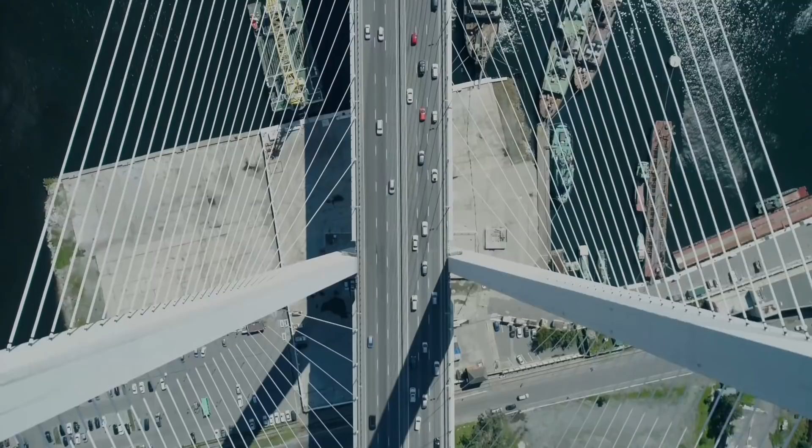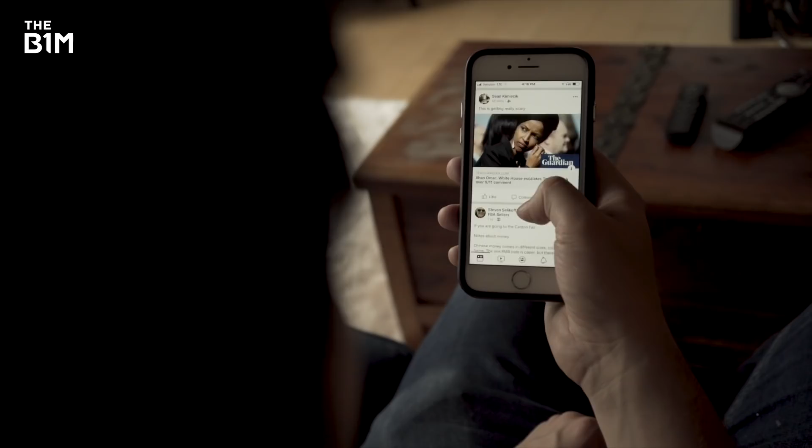The world we inhabit is now more connected than at any time in human history, transforming almost everything from the way that we communicate to how we trade, learn, and even develop relationships. The dawn of connectivity has had a fundamental impact on our culture.

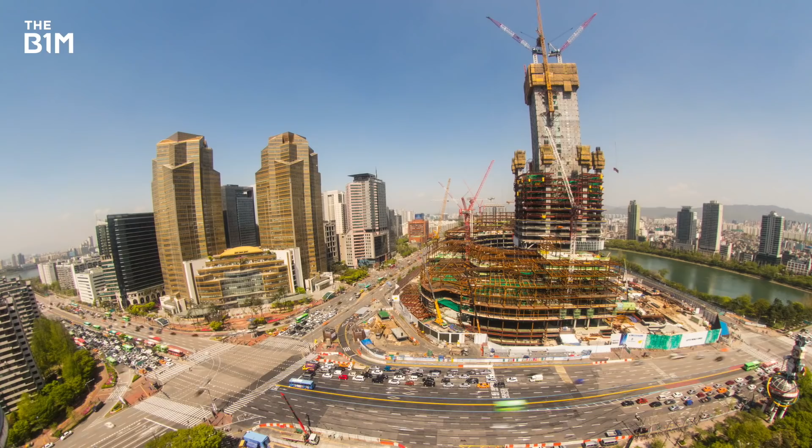No industry shapes each of our lives more than construction, and the sector is now being considerably disrupted by the very connectivity that its infrastructure projects helped to enable. Its people are united and working more collaboratively than ever before. Its status is now truly transparent. Its once dusty surface has been turned into a platform for the very latest technological advancements.

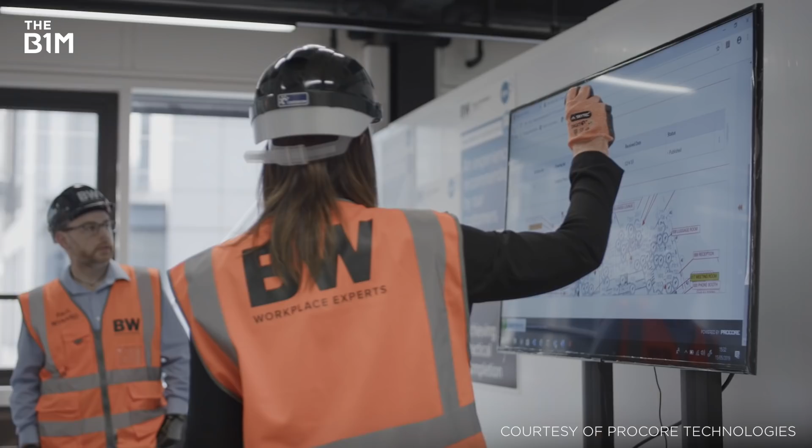So what do these new connected sites really mean for one of the world's most traditional industries? How do they work in practice? Which technologies are being deployed? And how will they improve the buildings and infrastructure that shape all of our lives? This is the Connected Construction Site.

In the past decade, our societies have become shaped by the connectivity enabled by digital technologies. From the way we do business to how we shop, communicate with our friends and family, and even form opinions, this connected world is having a fundamental impact on our culture and way of life. The introduction of connectivity into our already highly globalized society has seen the world begin to change at a pace not experienced before.

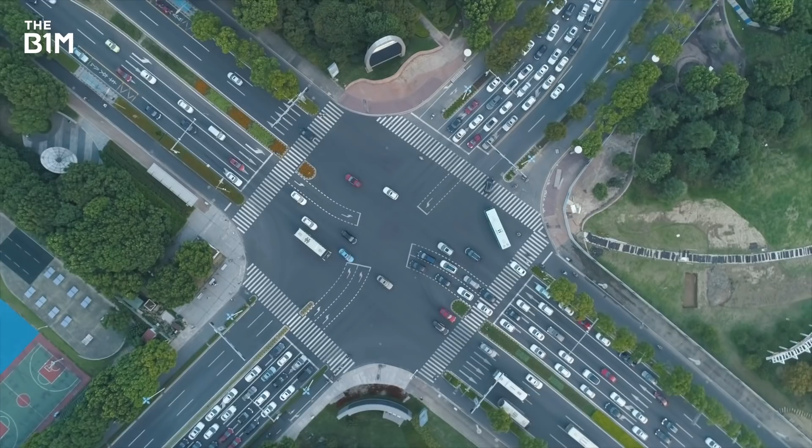Enabling that change, underpinning the way that each of us live our lives, and the way in which almost every organisation is able to function, is the construction sector. From the homes we wake up in and the infrastructure that we travel on, to our workplaces, schools, hospitals, and our vast cities, construction has a fundamental impact on nearly every human being on Earth. Such influence makes it critically important to get our built environment right.

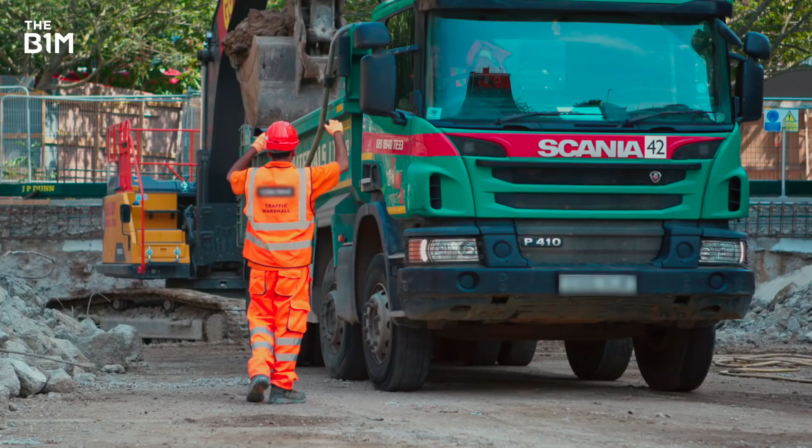Now, project teams around the world are beginning to leverage the full potential of connectivity and seeing it transform the schemes they are delivering. These connected construction sites put people first and aim to serve them in the most useful ways possible. They bring the people and the various elements of digital information about a construction project together into one place, a powerful dashboard that enables a scheme to be monitored, coordinated, and controlled centrally.

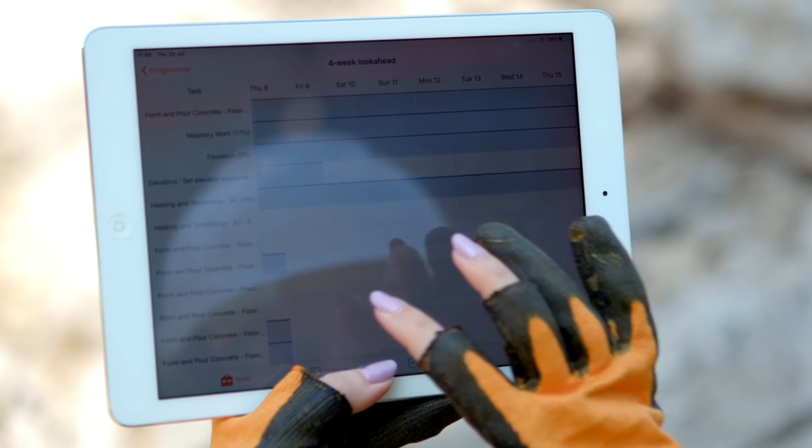Using cloud-based technology through platforms like Procore, connected sites make accurate information available to anyone who may need to see it, wherever they may be, regardless of the desktop or mobile hardware they are using. They effectively create a single source of truth, a reliable connection to near real-time data about a project that drastically reduces the time spent searching for information or checking that that information is correct.

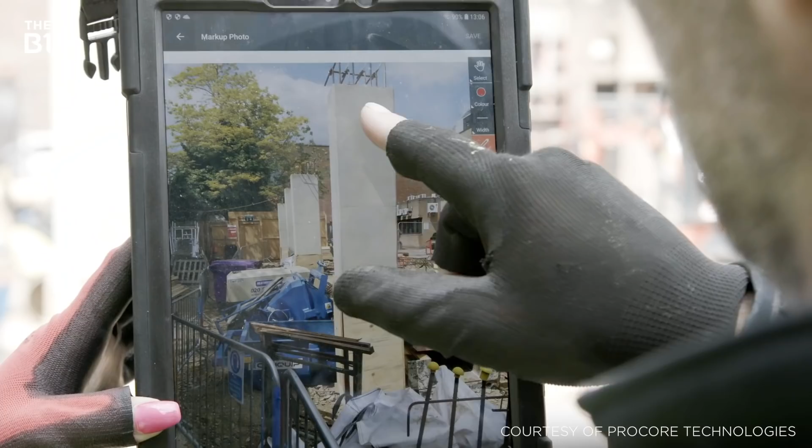The impact that connected construction sites have on the people that work on them is profound. They shatter the siloed working cultures that have encouraged adversity and long prevented the industry from collaborating, and replace them with transparency, building trust and improving morale among project teams, the most important asset to any construction scheme.

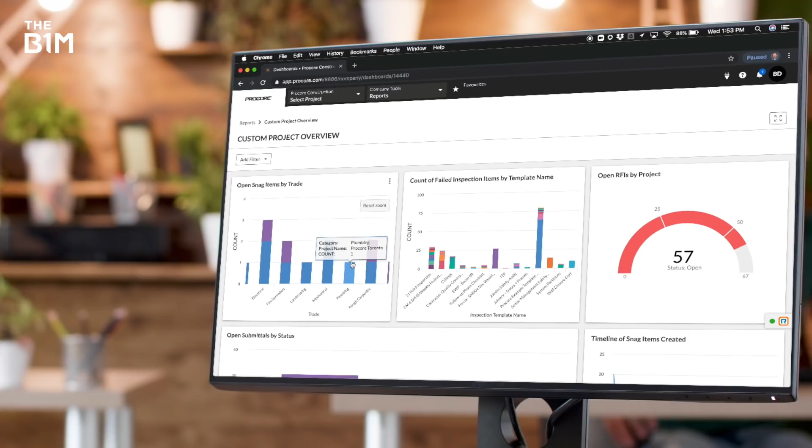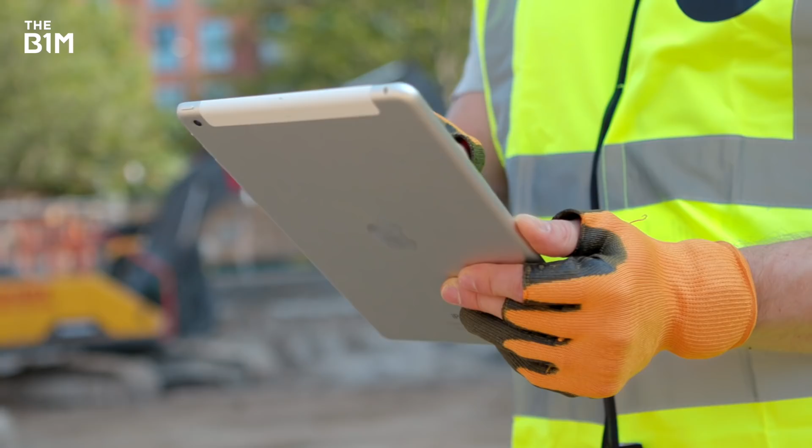The centralized cloud-based dashboards that connected sites create can be used to pull in data from almost every aspect of a project. Beyond the highly visual and informative project overviews that can quickly inform team members, tools like Procore bring all of the project management and collaboration functions into one powerful platform.

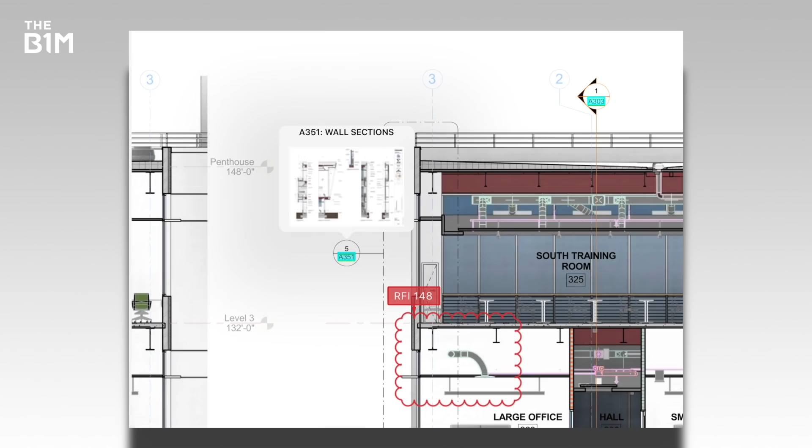The correct drawings or 3D graphical data from a building information model can be placed into the hands of everyone who needs to access them, regardless of where they are, while version comparison and overlay tools allow for easy interrogation. In-drawing hyperlinks to callouts can also greatly improve productivity and overall build quality.

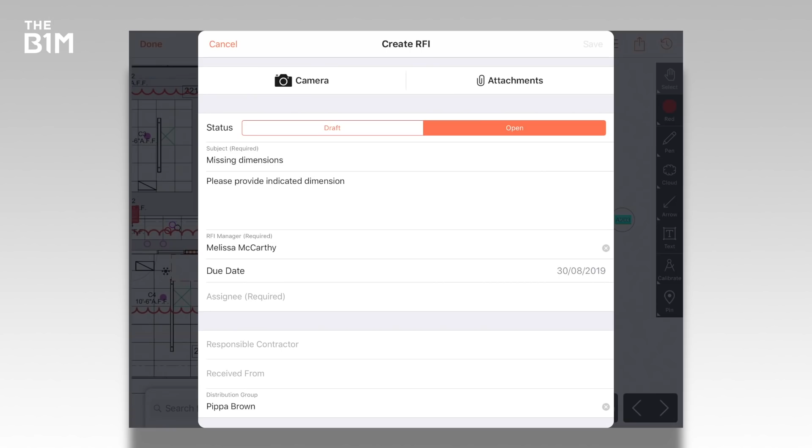By uniting people on a single platform, connected construction sites transform communication. Requests for information, or RFIs, between team members, for example, can be created faster and explained with greater clarity through notes, annotation tools, and photos. By virtue of being connected to all other information on a project, they can also be linked to related and supporting information, or even a physical location reference, with ease.

A similar approach can be used to streamline the snagging process. The latest program and scheduling information can also be made available to those who need it. Tools like Procore enable quick views of a scheme's overall program dates, alongside deeper dives into the specific task activities.

The rise of connected construction sites is bringing cost managers into the heart of project teams like never before. Now, with access to real-time information from the field about the status of a project, cost tracking and forecasting can become significantly more accurate, saving time, introducing transparency, and improving margins.

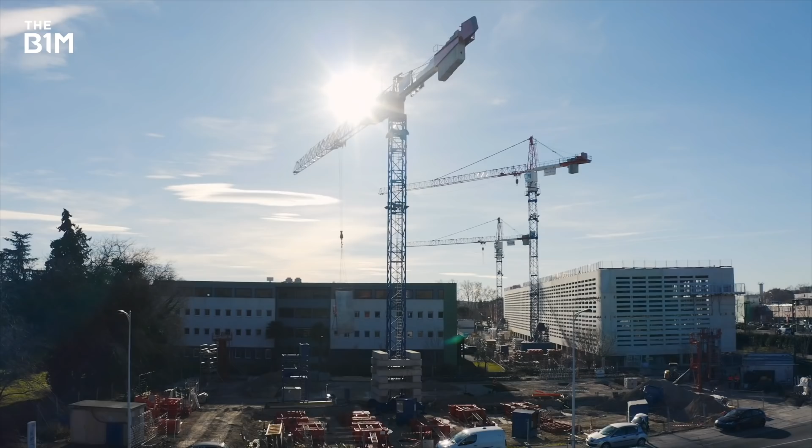Connected sites are also providing real-time insight into the physical status of a project. Data from electronic access control systems can be used to determine who is on site and when, improving safety in the event of an emergency while helping to optimize productivity.

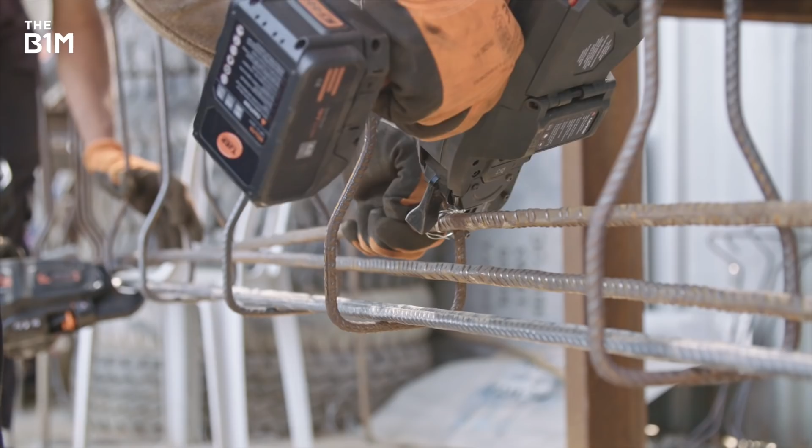With everyone on modern construction sites now responsible for creating a safe working environment, platforms like Procore enable any individual to flag and communicate a health and safety issue, adding photos if necessary.

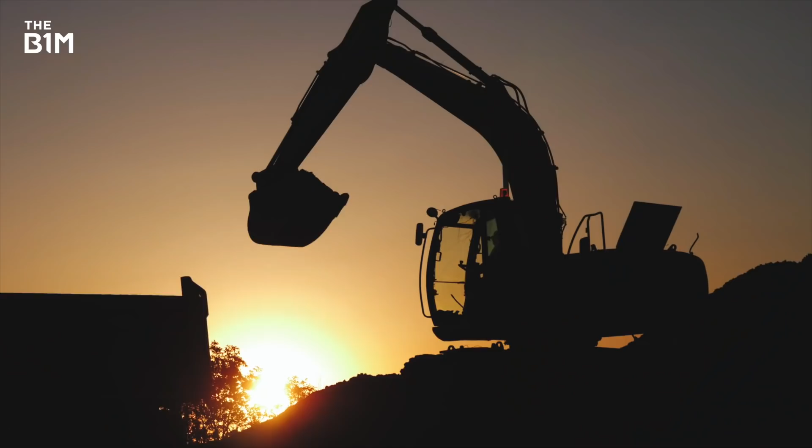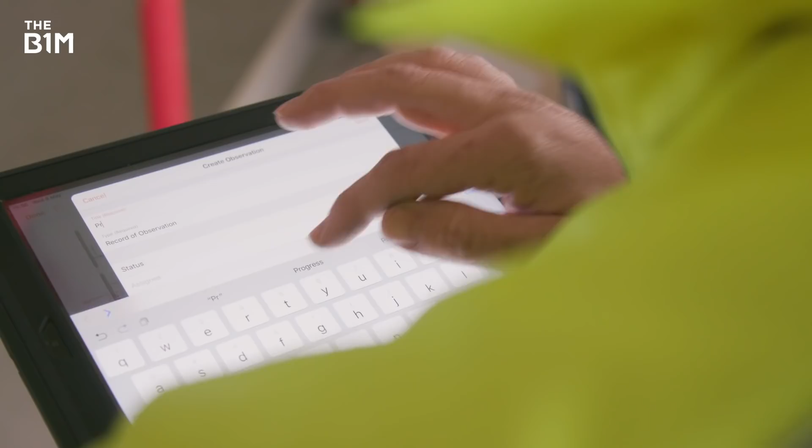Beyond people, the status of equipment resources can also be integrated. Connected sites enable project teams to track the number and type of machines on site, their current locations, and their working capacity. Machine manufacturers and those responsible for maintenance can be kept up to date on machine performance, and where issues do

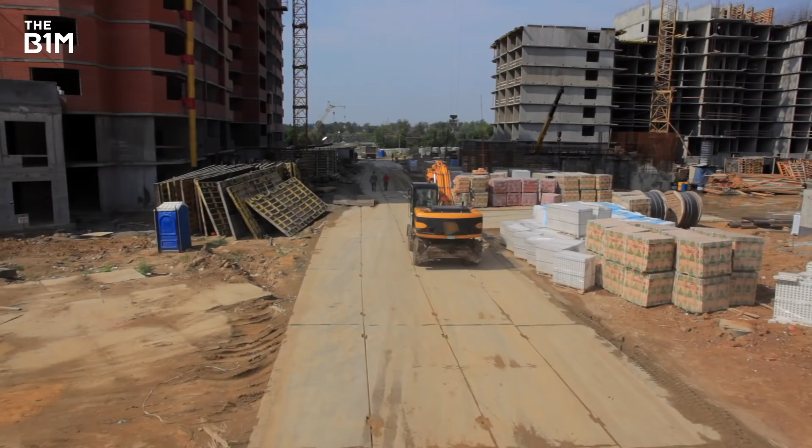arise, diagnosis can be undertaken remotely without the need to visit the workface. Connected sites can even extend to material monitoring. Integrating sensors into materials like concrete can provide project teams with real-time data on its curing status and strength, improving quality.

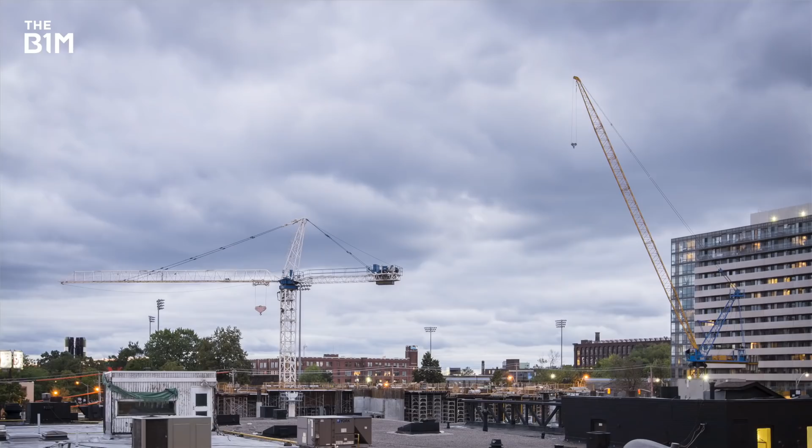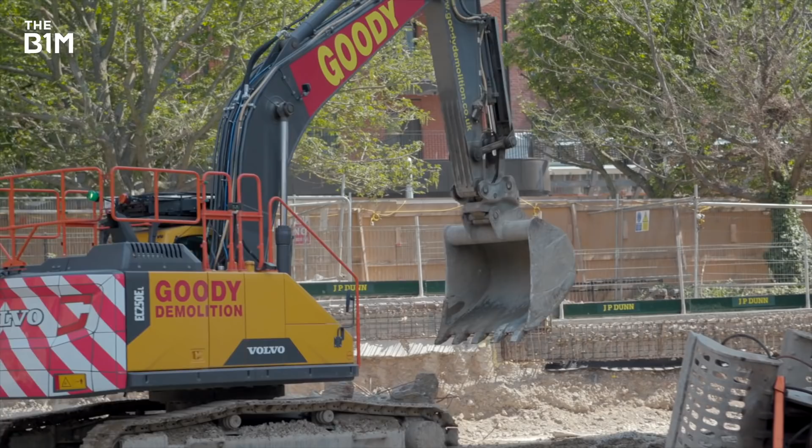Beyond having a transformative impact on specific projects, this new age of connectivity on construction sites can open the construction market up to a broader variety of businesses, and in particular, technology firms. Our connected sites can effectively become platforms that almost any expert with an idea or particular challenge to solve can develop an application for, similar to the apps that many of us already use on our smartphones and electronic devices.

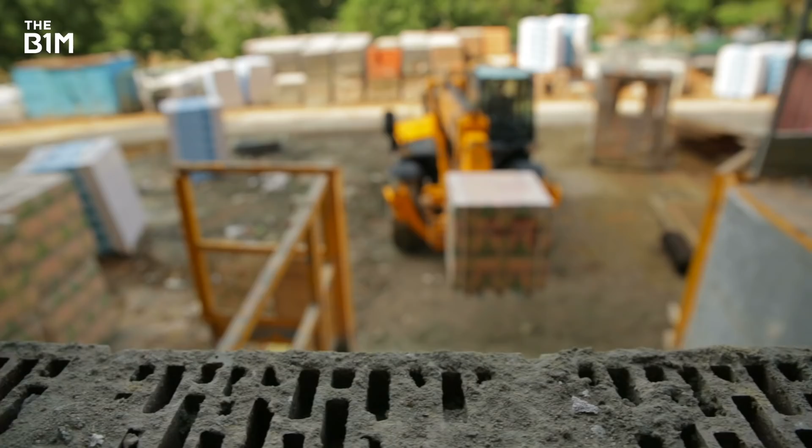Of course, connected construction sites do require some basic ingredients in order to function at their best. Highly reliant on connectivity, the regional cellular data network or project data network that these sites run on must be stable with good connection speeds, and plans should be in place for procedures in the event of a connectivity failure. This is particularly key for construction sites in highly remote locations. Platforms like Procore feature an offline mode that syncs when back online, ensuring that people remain connected even without an internet connection.

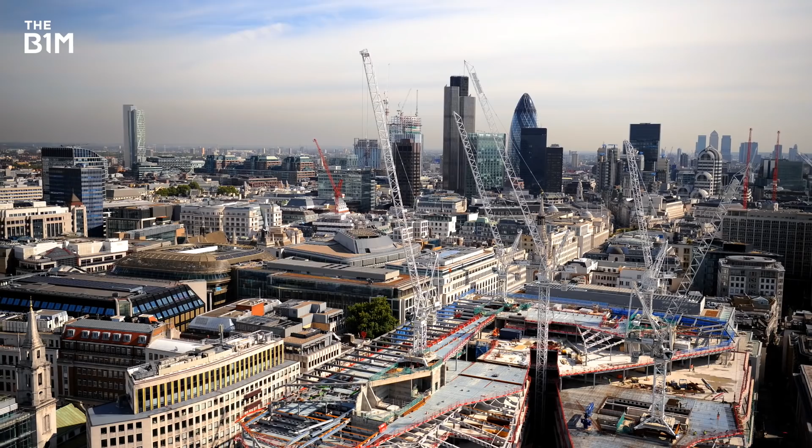Additionally, with the majority of project information available in the cloud and data now becoming the world's most valuable resource, security must be considered from the outset, both within the project team, which could include several hundred different organizations on major schemes, and externally. Many technology firms recognize the importance of security. Indeed, Procore's platform brings security to the fore, with a number of measures employed across its server infrastructure, user operating system, and data encryption approach.

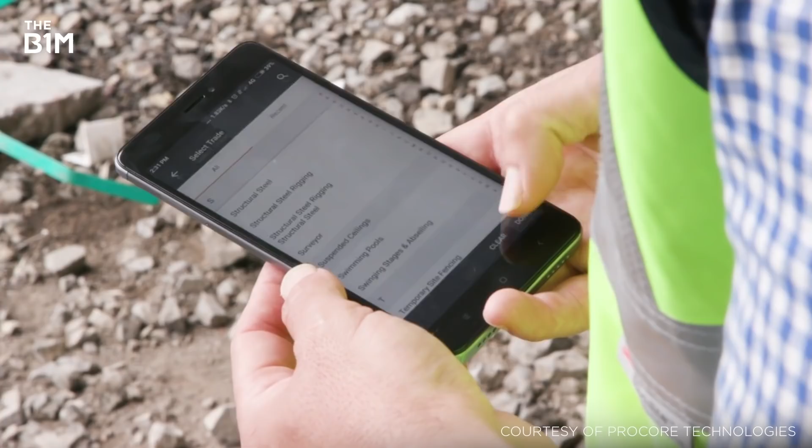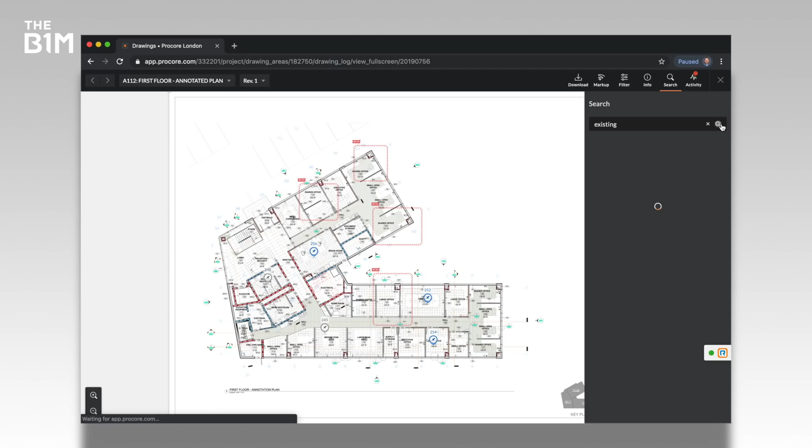Connected sites demand good information management from those working on them, and deliver ultimate value when this occurs. Studies have proven that intuitive connected platforms can influence behavior among team members, changing perceptions around the importance of strong information management. While intuitive tools and technology innovations like Procore's optical character recognition tool can all help to improve information management on sites, they are ultimately no substitute for a deep-rooted culture of celebrating reliable, well-managed data.

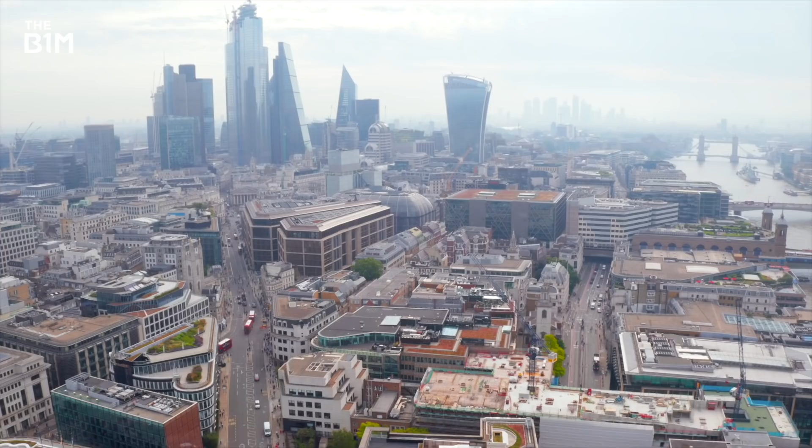While the rate of change that our world is currently experiencing may be extreme, it is also unlikely to ever be this slow again. With connected construction sites now effectively turning our sector into a platform for technological innovation, and substantial improvements being made to IT infrastructure in developed nations around the world, there are few limits to the advances that could now be made.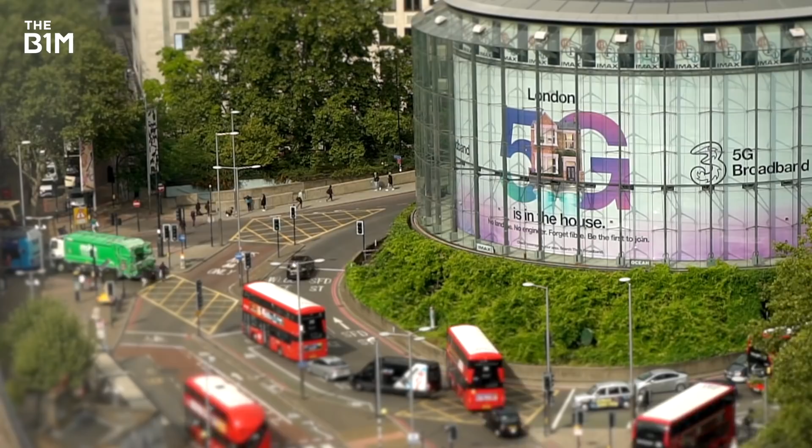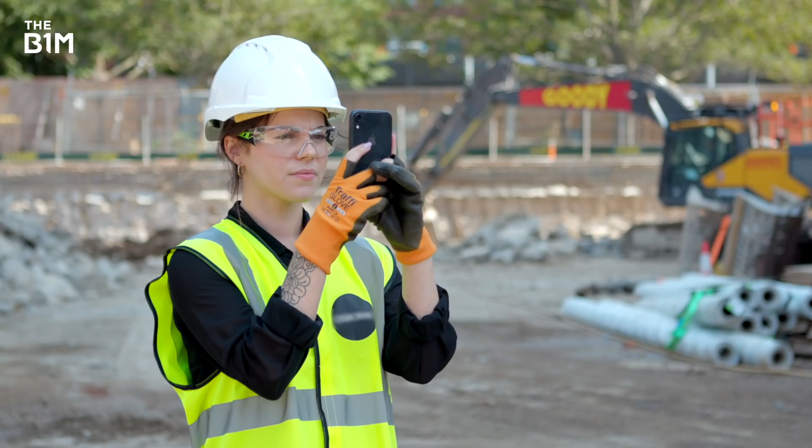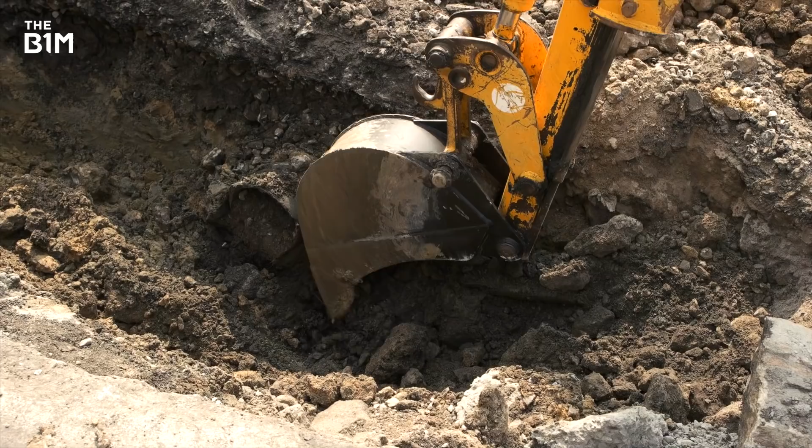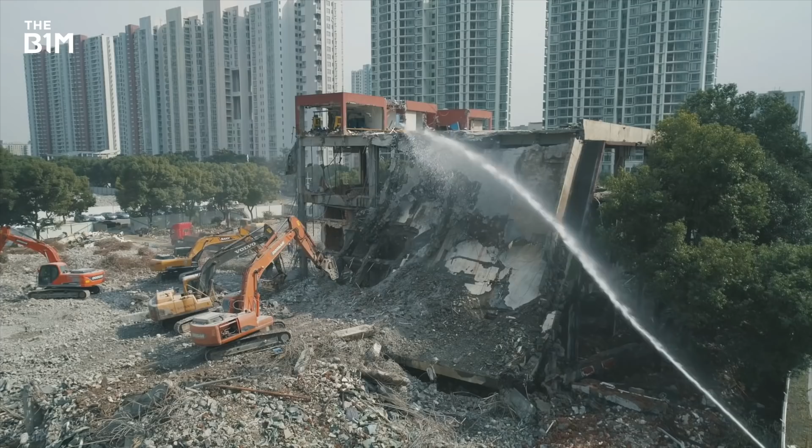The 5G connectivity that is already landing in some markets, including in the UK, could unlock new levels of site efficiency and take real-time reporting to the point of feeling instantaneous. Meanwhile, as heavy equipment manufacturers continue to innovate, we could see connectivity allowing machines to be operated remotely, even from other countries. Such progress could be especially advantageous for high-risk activities or for sites facing extreme weather conditions.

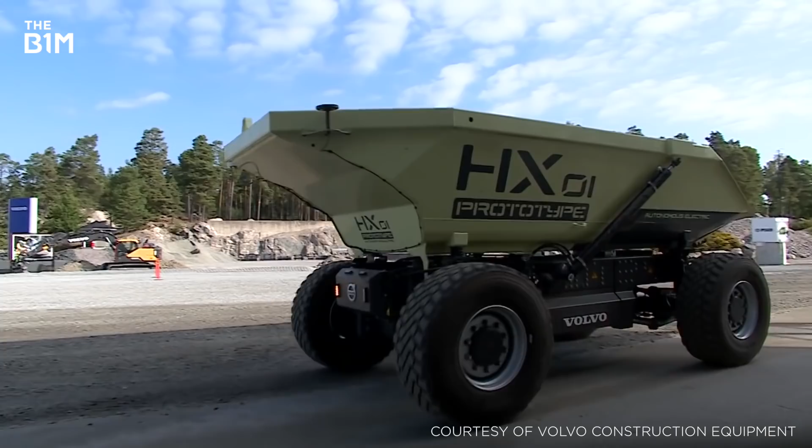Connected sites are also likely to speed the rise of autonomous vehicles, such as these machines developed by Volvo Construction Equipment and currently being trialled in Sweden.

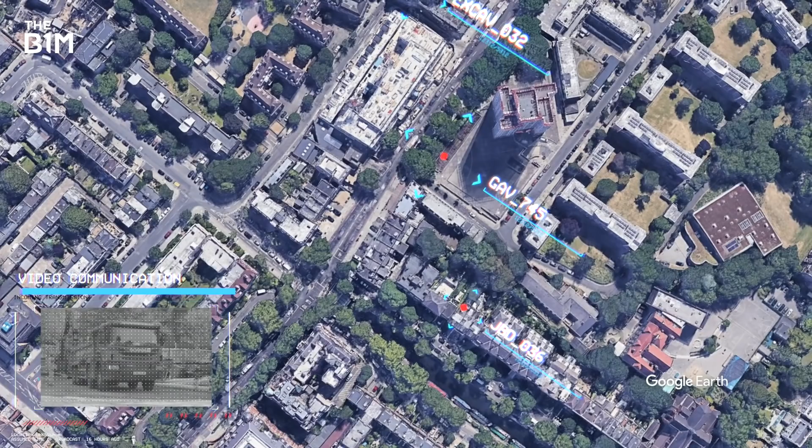The evolution of wearable technology from the consumer products we are already familiar with into powerful business performance tools could also be transformational. Wearable tech could integrate with ecosystems like Procore to provide a real-time map of a construction site, showing the locations of people, equipment and resources, and their status.

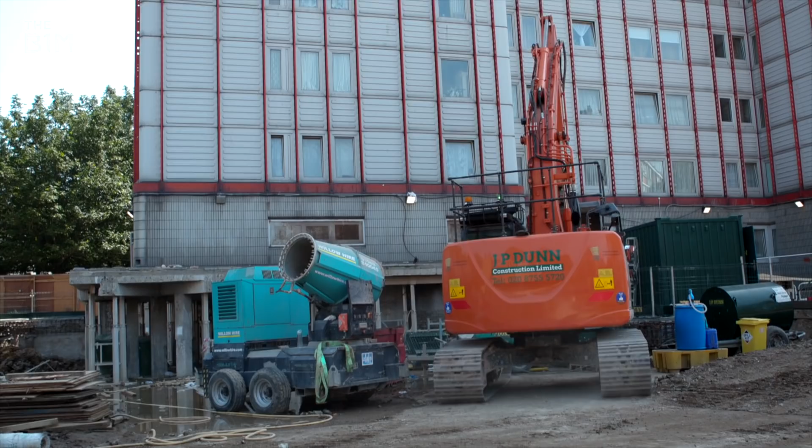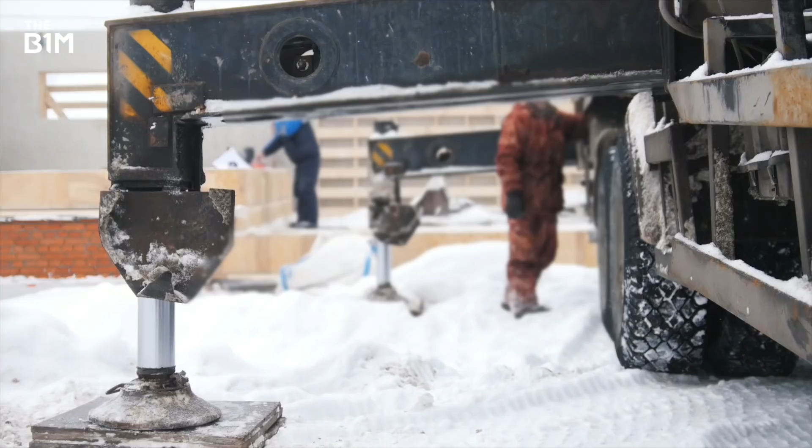The data collected from autonomous construction vehicles and wearable technology in use across a project team could then be leveraged to provide trend-level overviews of incidents along with their frequency and location, team productivity, performance, or site weather conditions. Indeed, with the entire construction industry eventually working on connected projects, the potential to leverage trend-level data and take an aggregate view of how our sector is performing is huge.

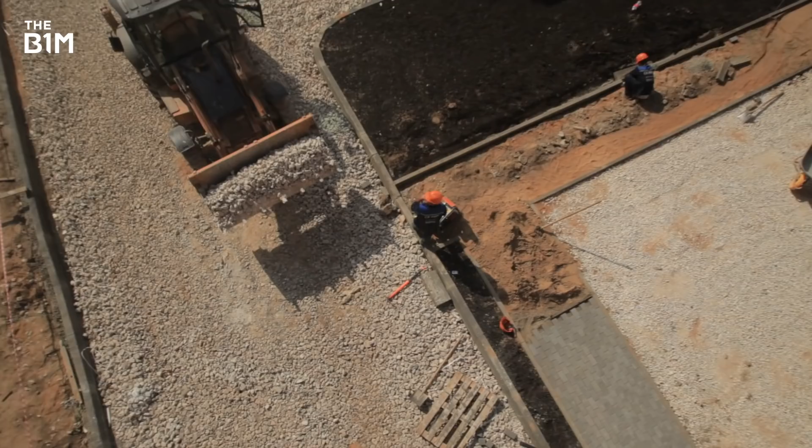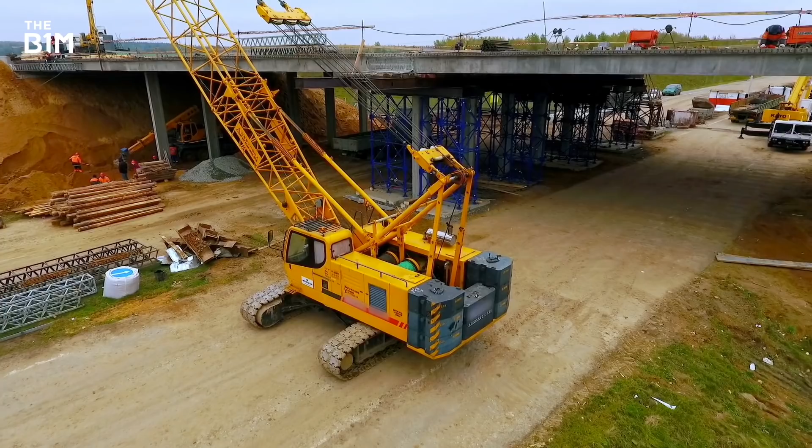Such data could be integrated with AI assistance and then used to identify safety risks from previous similar schemes, presenting them to a project team for consideration. It could be used to flag quality issues encountered previously, suggesting improved construction details or methodologies. It could identify ways to speed up programs.

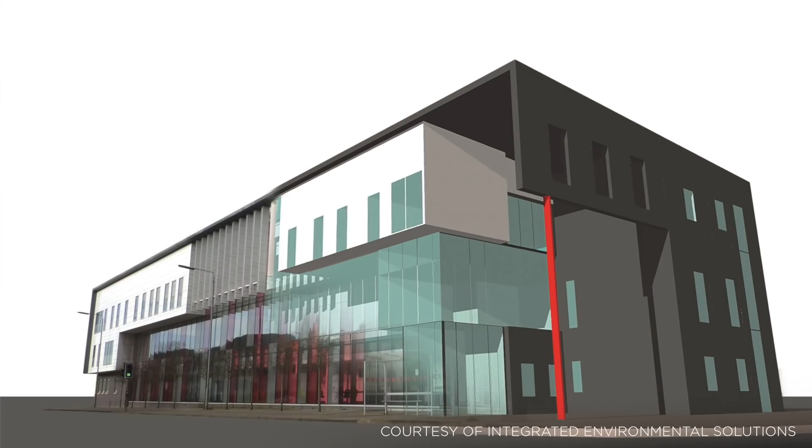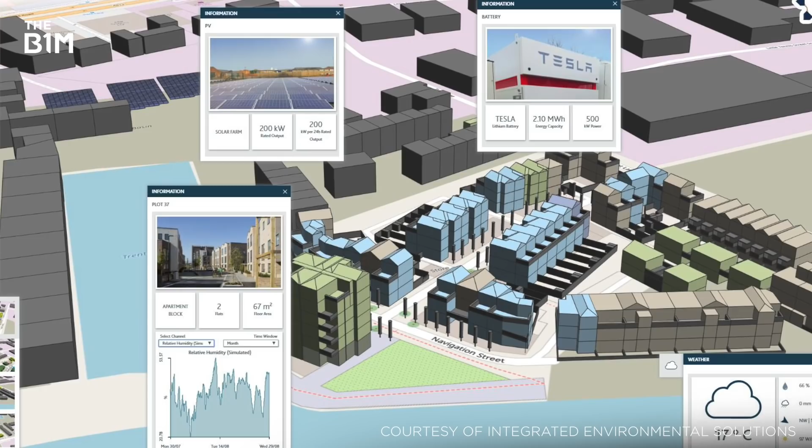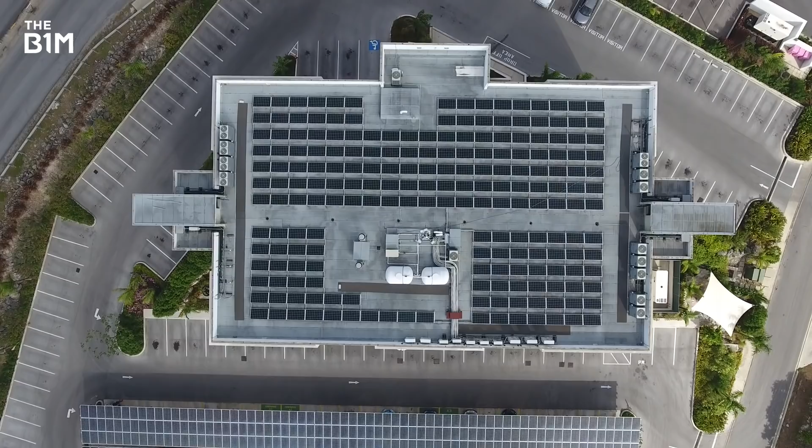Beyond the construction delivery phase, connected sites lay the foundation for the buildings and infrastructure that they deliver to be operated digitally, optimizing their performance. Increasingly, this may take the form of a digital twin, a complete digital replica of a built asset that is updated with real-time performance information through sensors and which can be used to simulate its performance in a range of scenarios. This enhanced level of intelligence around our building stock will enable us to improve how our buildings support our society while reducing their impact on the climate.

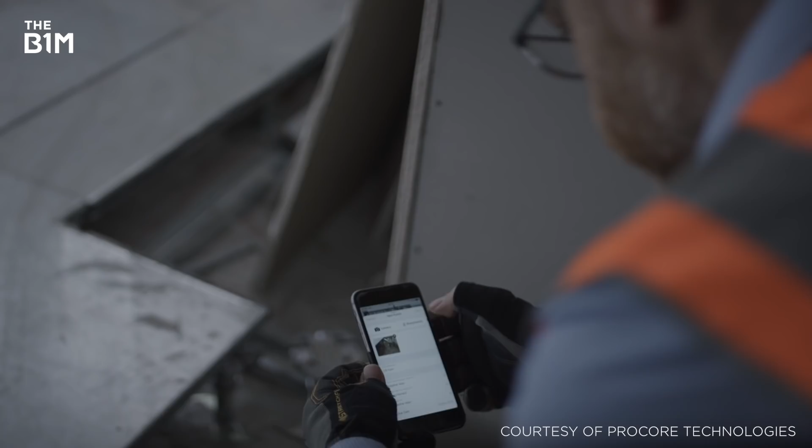From uniting teams and catalyzing productivity to breaking down silos, enabling the rise of new technologies and transforming how our built world is delivered, it is clear that the age of the connected construction site has dawned, and that, as a result, the buildings we all live our lives in, that shape our cultures and largely govern how we impact this planet, are set to be dramatically improved.